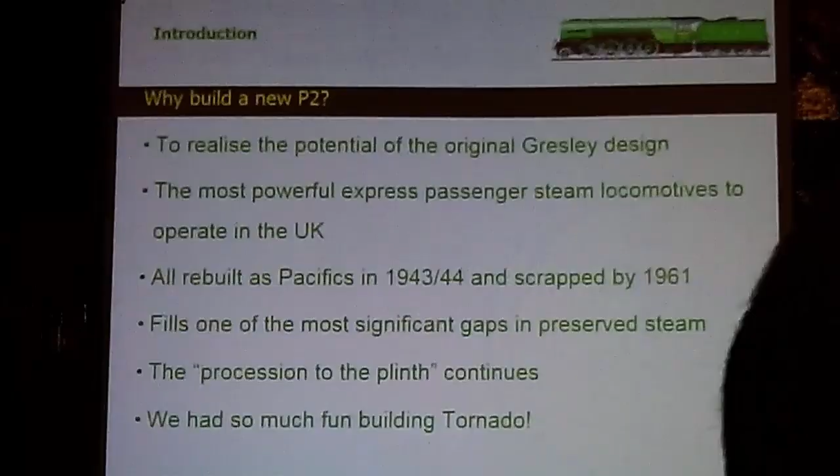Now, why build a new P2? Well, I suppose the thing that isn't really on this slide is that the chairman and myself always wanted to build a P2. In practice we built an A1 first, which was actually very much the sensible thing to do, because unlike the P2 class, the A1s work straight off the drawings and out of the box. And if you only look at their history, there was very little modification work between the birth of the A1s in 1948 and when they were withdrawn in the mid-60s.

On the other hand, the P2 has the odd problem or two, which I'll come on to. We were thought to be barmy building a new steam locomotive in 1990 as it was. I think if we'd chosen a P2, we'd have just never been given any credence at all. But we went on and built the A1, proved that it works and works very well, so P2 came along as the next choice. It was the most powerful express passenger locomotive in the country at the time.

Certain fraternity from the LMS will point out that the Duchess, in terms of horsepower, produced more on test than P2 did. I'm going to do something about that. We're planning to live up to our claim here. However, all 6 of them, there were only 6 built, were rebuilt as Pacifics in 1943 and 44 after Gresley had died, and his successor, Edward Thompson, basically had an almost pathological dislike of much of what Gresley did and was determined to make his mark. Unfortunately, his rebuilt engines were really no better than the worst performances of the P2, and had the fundamental drawback that they couldn't haul such big trains because they only had 6 driving wheels instead of 8.

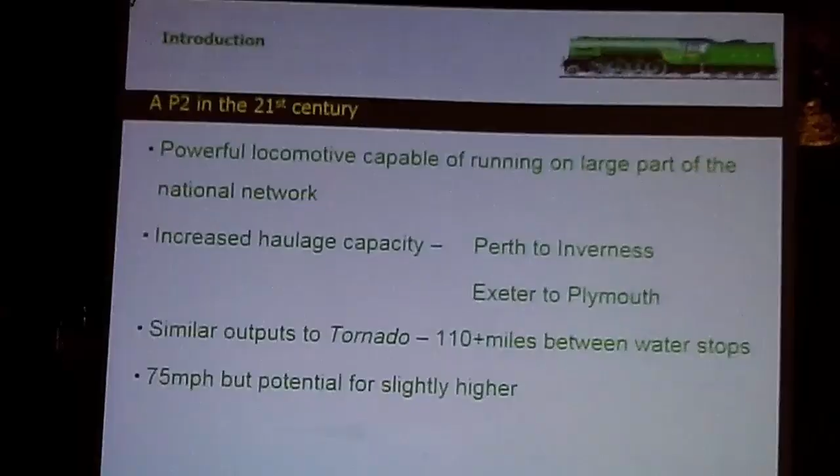So, P2 in the 21st century. Tornado will take 13 coaches almost anywhere, but won't take 13 coaches to Inverness or over the South Devon banks from Exeter to Plymouth because of the severity of the gradient. She'll do it all right, providing we don't have to stop, but it's very questionable as to whether she'd be able to restart 13 coaches on the 1 in 40 curvature of the South Devon banks if it's raining. So we are limited to 10 down there, and limited to 12, or technically 11, though we have taken 12 to Inverness, where the ruling gradient is about 1 in 60. The P2, with its extra pair of driving wheels, won't have such a limitation, so we can effectively take 13 or even 14 coaches anywhere we choose.

We say similar outputs to Tornado. We redesigned Tornado's tender to take extra water at the expense of some coal, so that she now takes 6,250 gallons of water in the tender instead of 5,000. And that gives us 110 miles minimum between water stops. That is actually quite important when we're on the East Coast Main Line. We are the only engine on the network that can do King's Cross to York with only one water stop.

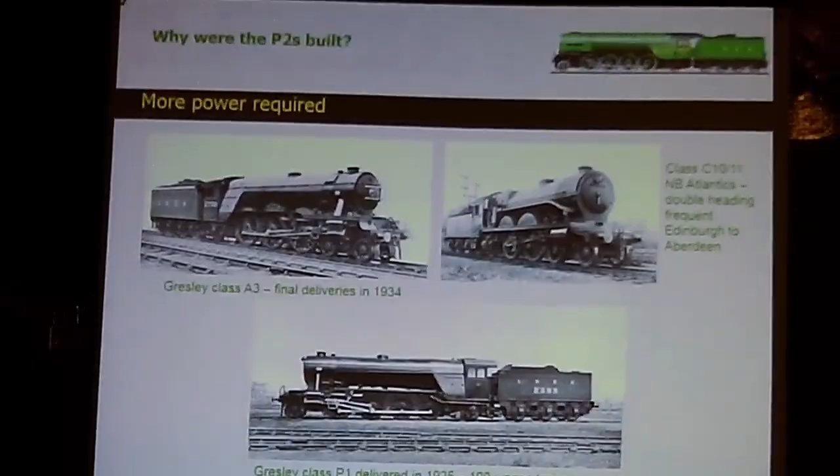So, why were the P2s built? Well, it all really happened back in 1930 when the LNER introduced third-class sleeping cars. And suddenly there were 2 sleeping car trains a night going to Aberdeen, which were loading consistently to 15 coaches and even more. And the maximum that the top-line engines, the Gresley A3 Pacifics - think Flying Scotsman - were allowed to take to Aberdeen unassisted was 11 coaches, because there are some fierce gradients on the railway there. And in practice, the civil engineer wouldn't allow you to hang another engine on the front of an A3 because the consist was too heavy.

So they were using pairs of the North British Atlantics, which is the engine you see on the right. Now, they were known as the miners' friend, as their coal consumption could be astronomical in practice. For an engine whose horsepower is about 2/3 of that of the later Pacifics, it burnt the same or slightly more coal. So you can imagine 2 of them were not an economic proposition.

So Gresley was invited to look at the idea of designing an engine which would haul these trains from Aberdeen, from Edinburgh to Aberdeen unassisted. Now, he had a bit of a go at the Mikado, or 2-8-2 wheel arrangement, back in 1925, when he built 2 freight engines based on the Flying Scotsman design, but smaller, with more driving wheels, specifically aimed at being able to increase the load of coal wagons hauled from New England at Peterborough down to King's Cross from 80 wagons to 100 wagons.

And these engines had no problem hauling 100 coal wagons. The big problem was, though, the railway couldn't actually cope with 100 coal wagons in the loops, and the train had to be split to get it into the sidings at Hornsey. So, the LNER, always tight for money, decided it couldn't really afford to make all the civil engineering alterations, so those 2 remained on their own, although they were highly successful.

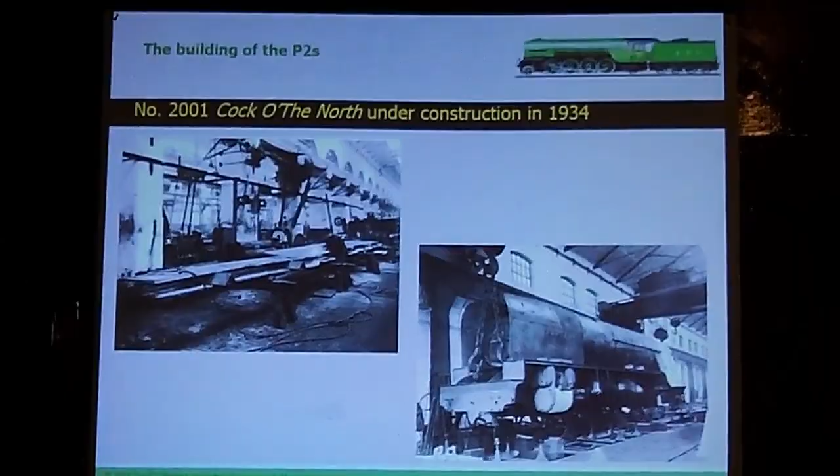1933, the LNER board gave Gresley instructions to work on the new P2 class, and you can see a couple of photos here. The frames are being cut out by a man with a gas axe, having hand marked it all out, which was the way you would start with on a prototype. On the right you see a photo of the engine nearing completion, and it looks like they are about to lift it to put the wheels underneath.

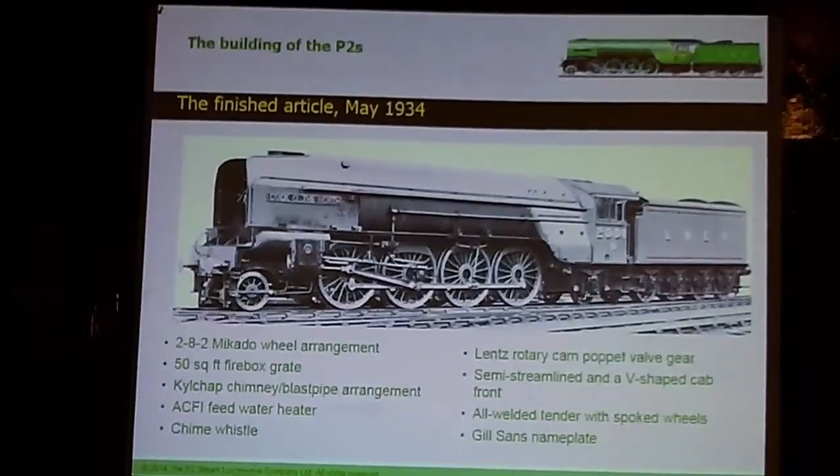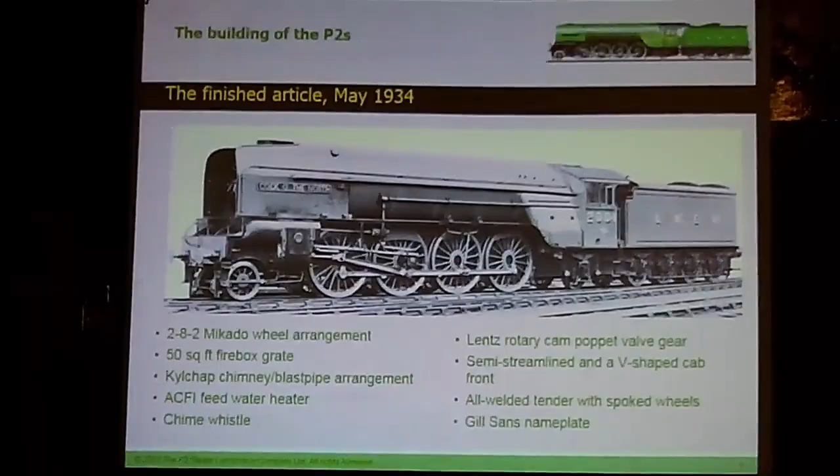It was the first time anybody had used a 2-8-2 wheel arrangement for an express passenger loco, and the first time an engine had appeared with 50 square feet of firebox, compared to the earlier Flying Scotsman type with 41 or 41 and a half square feet. It was also the first time he used the Kylchap double chimney arrangement, which subsequently went on to four of the A4s, including Mallard, and is generally held to be the reason Mallard was able to take the speed record.

They tried an ACFI feed water heater, a French device which used a pump to inject water into the boiler, preheating it through a heat exchanger in the smoke box. It was tried a few times in this country. The general consensus was that it improved efficiency because you recovered heat that otherwise went up the chimney, but it was so mechanically complicated that it offset the efficiency gains with the amount of maintenance required, so it wasn't perpetuated.

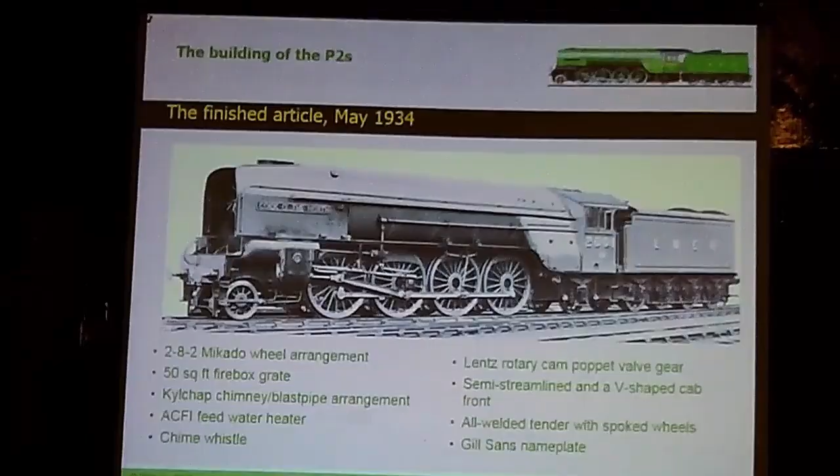It was the first time that the beautiful sonorous three-note chime whistle, which you heard on Tornado, was applied to an LNER Pacific loco. It also had this Lentz rotary cam poppet valve gear, which I will go on about quite a bit later.

Poppet valves are essentially like car valves. Normal steam locomotives, to admit steam to the cylinders and let the exhaust out, use pistons sliding up and down in a steam chest past ports. This uses the cam principle, where you've basically got a cam driving a poppet valve up and down to open it. The immediate beauty of this is you can have a separate cam driving the exhaust compared with the inlet valves, whereas on a conventional loco, the valve piston is both the exhaust and inlet valve, so you can't have the two timings altered relative to one another.

All welded tender - again, as an experiment, Gresley commissioned the Metropolitan Carriage and Wagon Company in Birmingham to build a tender entirely by welding. It's the first time it was done. And on a lesser note, it was the first application of Eric Gill's font for a locomotive nameplate, which the LNER subsequently adopted for all its advertising, correspondence, station names and the rest. Indeed, Network Rail still uses Gill Sans today.

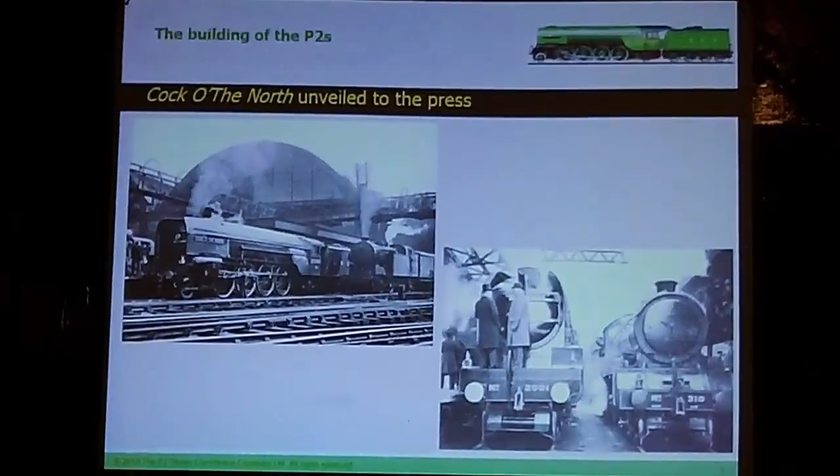Shortly after it was completed, it was unveiled to the press at King's Cross, and you'll see on the right Nigel Gresley himself with the bowler on, talking to the Lord Provost of Aberdeen on the front of the engine on its first visit to Aberdeen.

Meanwhile, and I'll come back to this in due course, another four locos were produced. The first thing that happened was a conventional version of this engine was produced for comparison, with piston valves, Walschaerts valve gear, and less of the experimental stuff. Then another four engines were built.

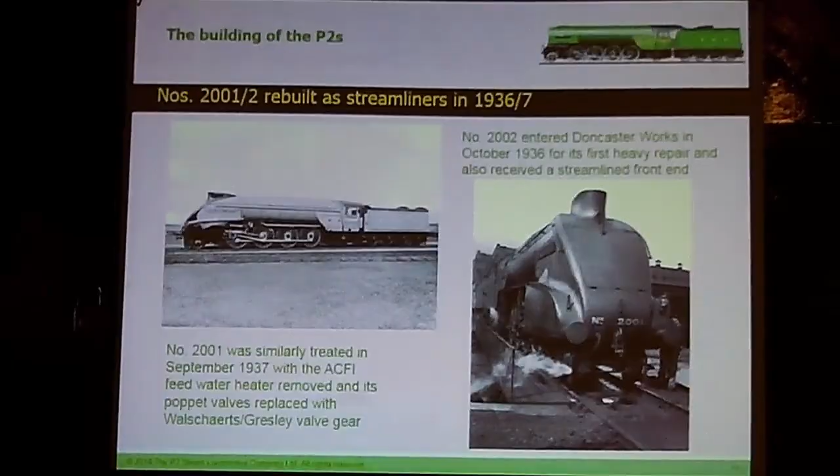This time, though, they appeared with the streamlined front end, similar to the A4 Pacifics like Mallard. They never quite worked - there was some question about whether the original design of front end would lift the smoke effectively, particularly with this double blast pipe, which produced very soft exhaust. Whereas it had been demonstrated that this arrangement on the A4s was the best smoke lifting arrangement ever fitted to a steam loco, apart from the publicity value it afforded them.

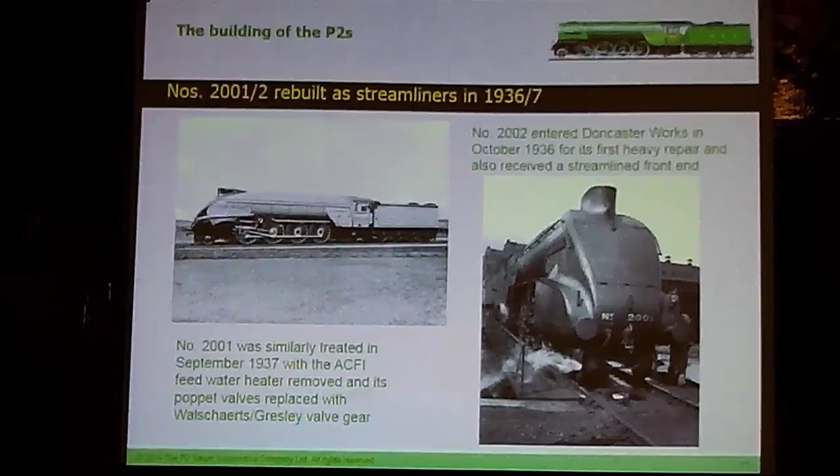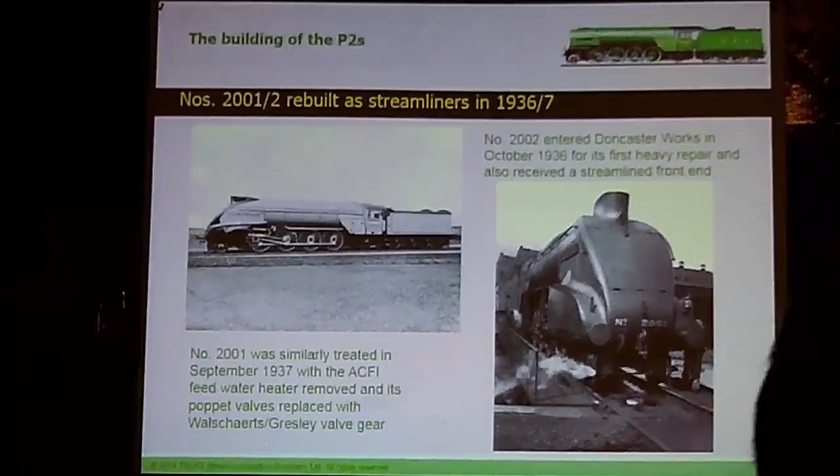Now, the engineering, he says, that's what we ought to be building. But there's a problem: we rely very heavily on interested people from the general public to fund this locomotive, and whilst serious railway enthusiasts will recognise that's a P2, a large number of the sort of passing interested railway type people will confuse that with an A4 Pacific and just say it's a badly built one. We have enough trouble with Tornado being confused with Flying Scotsman.

And therefore, we need to have this differentiation. The front end of the P2, as we are building it and as was originally built, was and is unique. There were only two of them ever built like that, and they didn't actually last long in that shape.

We are talking with aerodynamicists at the moment to ensure we don't have a smoke lifting problem, making use of the intermediate 70 years of aerodynamic development, so I'm reasonably confident.

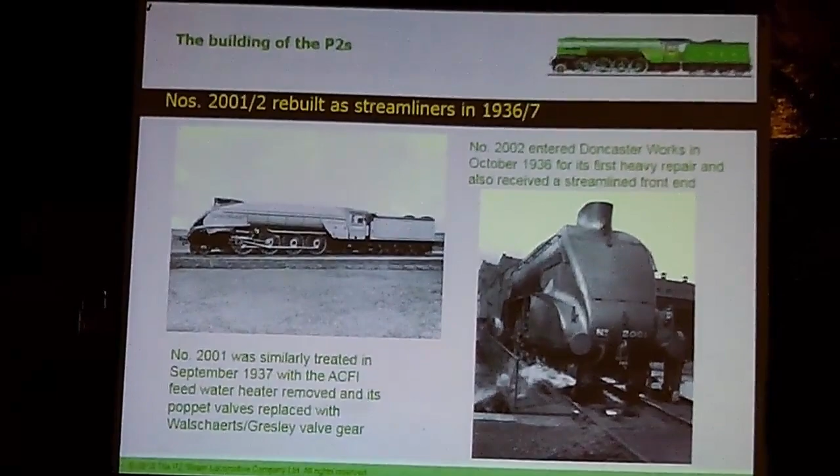However, the first two engines were rebuilt as streamliners in '36 and '37 to match the rest of the class. Now then, in order to make this happen, one of the key things is, are there any drawings in existence? And luckily, the National Railway Museum has got at least 300 drawings associated with P2.

Not quite such a full set as we had with the A1, where I reckon we had 95% of all the drawings that were ever needed for it. We've probably got about 70% or thereabouts, but bearing in mind we're having to do a major re-engineering exercise.

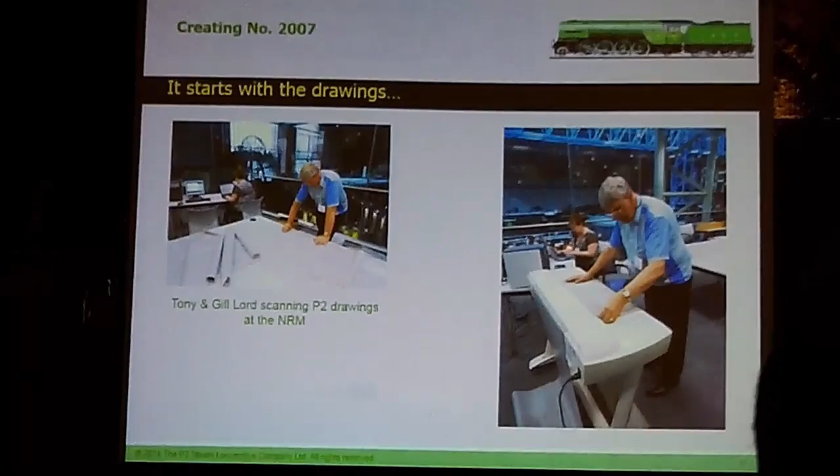Here you see my colleagues operating the scanner at York while we were scanning the original drawings electronically, so that we can do things with them.

So, one decision that was considerably different from Tornado was the decision to draw the entire loco in 3D CAD.

Initially, I wanted to do this because when we built Tornado, it all went pretty well, except for one area, and that was plumbing and electrical conduit work. There's an awful lot more pipework on Tornado than there ever was on the originals, because we have air brakes in addition to vacuum, and we've got a comprehensive electrical system on, whereas previously the A1s had a very primitive electrical system, and P2 hadn't got one at all.

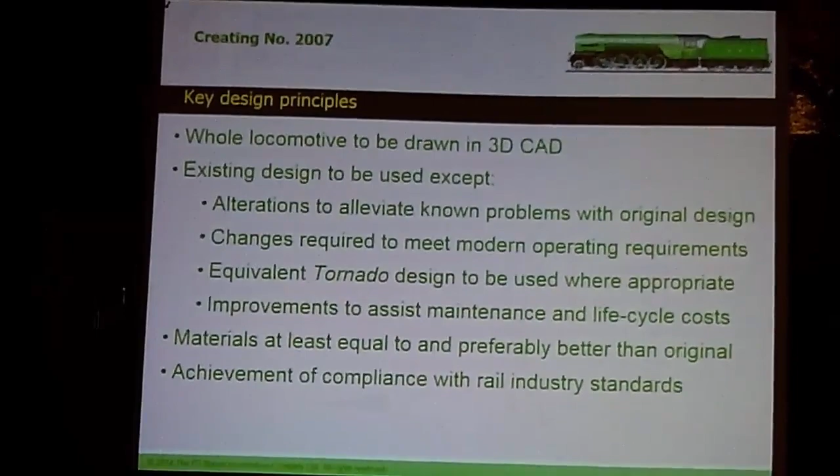So we designed all this and then installed it all off schematic diagrams with me pointing at the engine as to where things had to go. And if I was going to be away, I'd chalk on the side of the frames 'box goes here' with some dimensions, and I'd come back the following day and sure enough the electrician put a conduit straight through the space. This went on, and in some cases it took 3 attempts before we got the pipework right.

And some of it is not right. The electricians in particular have made getting this live steam injector off a job for a tame ferret with a big spanner. It really is a dog's breakfast, and we're not doing that again.

So this time I decided we were going to design all the pipework in 3D, and they would get detailed drawings as to where it went, and unless there was an exceptionally good reason, I wouldn't accept it anywhere else.

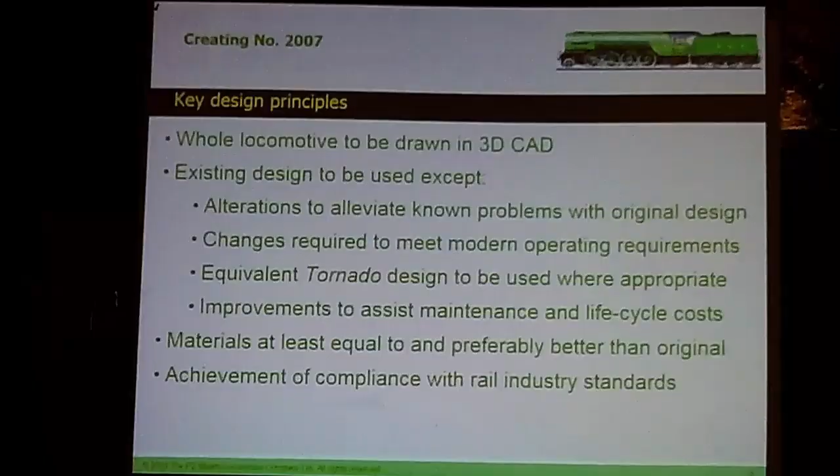That was it. However, since then, the chairman in particular, who also looks after our marketing, realised what lovely pictures this 3D CAD produces, and you'll see it all over our publicity. And it is very useful in other areas as well.

Now, we're going to stick to the original design as far as is practical. As I mentioned, there are some problems with this engine, which I'll come on to. We've also have to change it, make it work on the modern railway.

We've got to fit air brakes. We need electrical system. We need all the modern safety equipment, train protection and warning system, the on-train monitoring and recording, the black box, which of course is orange, this sort of thing.

And we also have certain other areas where we're just going to improve it anyway. In particular, we're going to use equivalent Tornado design where we can, and the LNER, in spite of being reputed for not going in for standardisation, they didn't at locomotive level, but they did at component level. And consequently, up there are probably about 250,000 quid's worth of wooden patterns, and half of them we're using again for the new loco, which is handy and useful.

We also are doing some improvements to help us with day-to-day maintenance and life cycle costs, the most spectacular one being the use of Tornado's roller bearing design instead of plain bearings.

But we've also, for example, fitted it with a rocking grate and a hopper ash pan, which greatly facilitates end-of-day servicing. And at the front end, we're putting, as we've done with Tornado, a self-cleaning smoke box, which is a whole series of baffles and grills, which, thanks to some aerodynamics, keep all the char out of the smoke box. They break it into tiny pieces and stick it up the chimney.

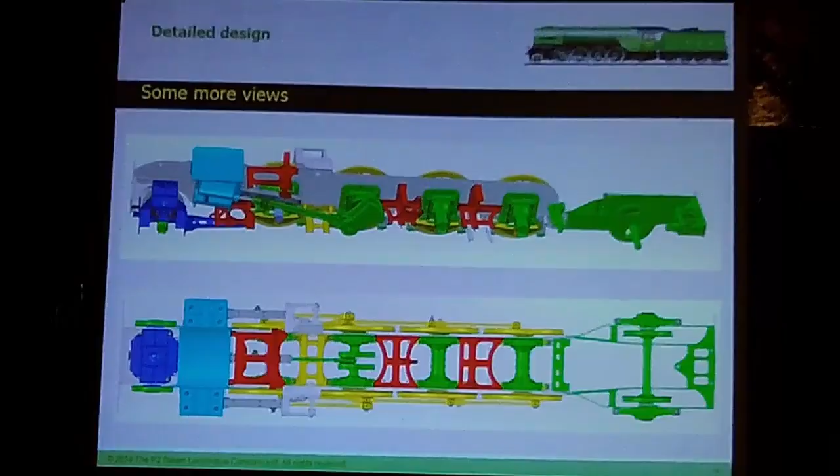We are also fitting roller bearings, and with them come things called cannon boxes. If you look here, the axles are actually encased in a steel casting from side to side. This economises on bearings. We use Timken roller bearings, and they are taper bearings, and they have to be used in pairs to give you end float control. By having an axle box effectively stretching from one side to the other, we only have to put 2 bearings in. In the case of the crank axle, we can't do that, so each of those axle boxes has 2 bearings in, so that's 4 bearings per axle. It was Timken's way of keeping under control the number of bearings that were in use.

Again, the green is stuff that's lifted off Tornado. The turquoise is the cylinder block, which I'll come on to a bit later, which we're completely redesigning. The red bits were steel castings, which we're modifying as fabrications.

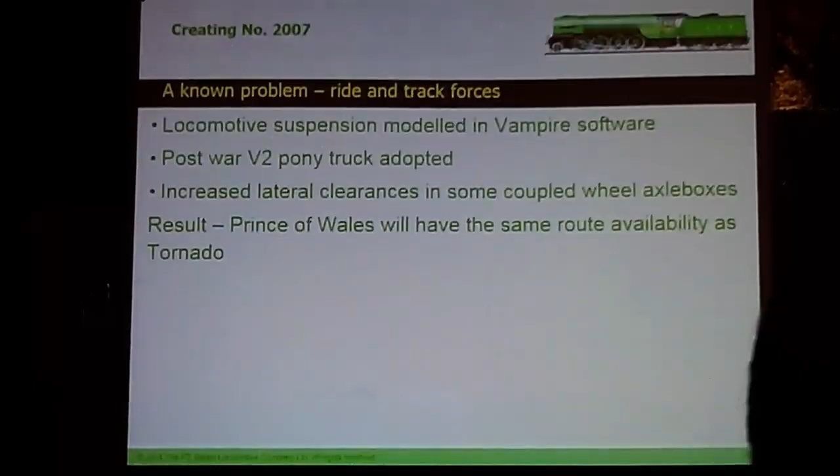We are casting wherever we can realistically do it, making a lot of use of polystyrene patterns, but the problem we've got with big one-off castings is that the pattern cost runs into tens of thousands of pounds, and we only need one at the end of the day. Polystyrene can be used, it's much cheaper to make, but if it's a big, thin pattern - this is using expanded polystyrene, where you make the pattern out of it and then bury it in the mould and leave it there. You pour the steel on top and it vaporises, because there's only about 1.5% actual solid matter, the rest is gas. But it's not strong enough, such that when you pack it up firmly in the mould, it will distort. And we've had this trouble when we were on Tornado trying to do bigger castings that way.

So we're going for fabrications. We can use better materials, we can weld to boiler standard with full penetration welding and full NDT, and be confident that it'll be a lot stronger than the original casting was. We also stress relieve before we machine, so we're back to almost the cast condition in terms of metallurgy.

That's one thing. Now, the other thing we've got to sort out: the engines certainly had a bit of a habit of falling off on tight bends in yards, which was put down to their excessively long rigid wheelbase, which isn't the case, as we've discovered. The pony truck at the front, the 2 small wheels, are suspended using Gresley's patented swing link suspension.

Basically, the locomotive sits on the pony truck through a series of links which are at a different angle, so that as the pony truck moves sideways when you go around a bend, it tries to lift the front of the engine up a bit, and the idea is the extra weight pulls the pony truck back to the middle. The only problem is when it goes right over to full travel, it's attempting to lift the front of the engine 1 7/8 inches, which it won't do because the springs will equalise the pressure.

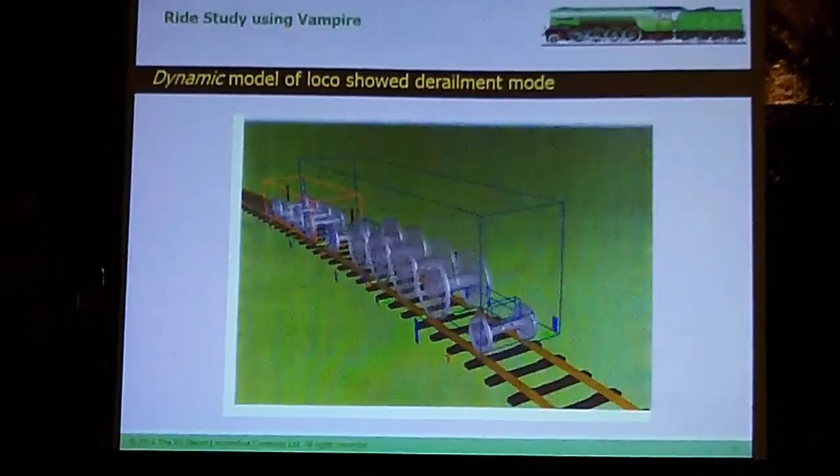In order to demonstrate all this, we commissioned a Vampire study - Vampire is the software that the railway industry uses to predict ride and track forces. This is an excerpt from it showing the engine just about to go around a curve which will derail it, and the reasons why it was doing it. The whole lot's modelled accurately on the computer.

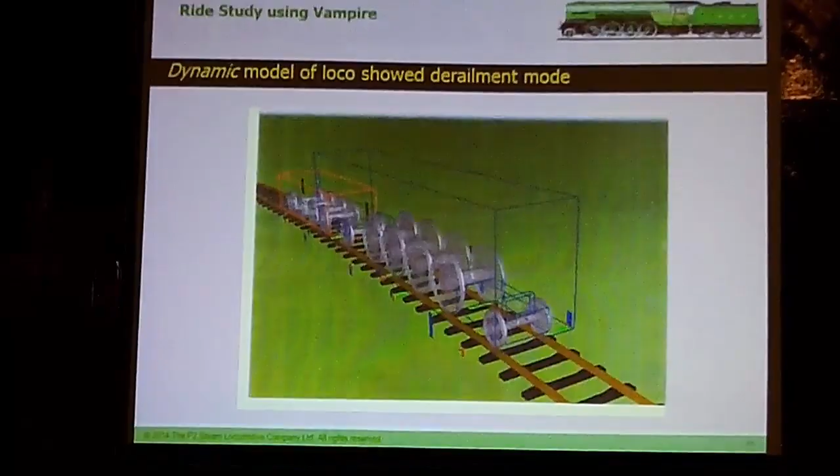We had a feeling we were going to need to do this a long, long time ago, because when we tested Tornado, we had to do some limited track force testing, only to demonstrate that it wasn't going to break the rails, and it wasn't any worse than the modern standards allow. But we took a very comprehensive set of track force data by instrumenting the engine on our final test run from Tyne Yard down to York.

Now, conveniently, the Network Rail yellow new measurement train had been through the week before, and therefore had accurately recorded the condition of the track from Tyne Yard to York. Delta Rail, who were doing the modelling for us, produced the model of Tornado in software, ran it over the recording of the actual track condition, and demonstrated that...

Tornado's model was not far off what actually happened, and by tweaking the model about, they actually got it very, very close to, in reality, what would be predicted from the model's ride output. So that means we've now demonstrated that Vampire can be used for a steam loco.

The next stage is to reconfigure the model so it's a 2-8-2 with the suspension arrangements that this has got. Have a look at it again. And the result was that it did show that this swing link suspension was causing some strange effects from time to time, but with these side control springs, it was fine. In fact, with that and the other minor tweaks we've done, it now actually rides better than Tornado at speed, which you'd expect with a long rigid wheelbase on an ordinary track, and it doesn't produce excessive track forces when it's going around bends. So that fixed that one.

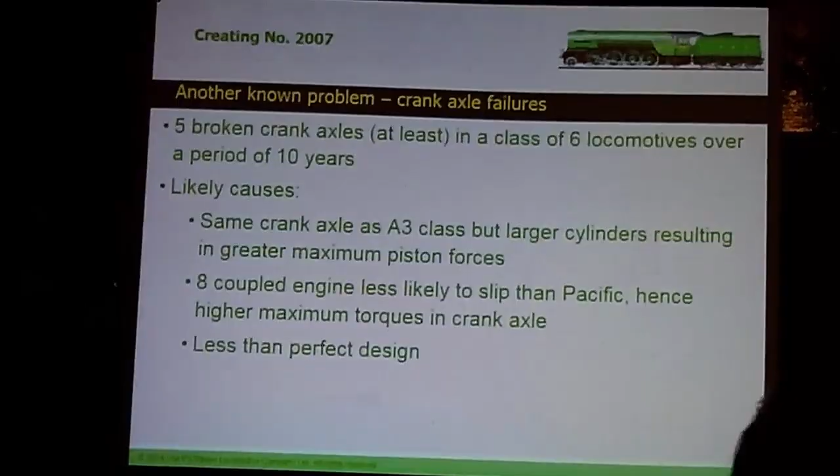The next problem we had - the wheels fell off from time to time. The P2 class, in a 10-year period of operations with 6 locos, had 5 broken crank axles, and they always broke just behind the wheel. Now, the likely cause is the same crank axle that the A3 class has in Flying Scotsman's got, but with larger cylinders. Also, 8-coupled engine instead of 6, they don't slip very often, so the peak torques will be much higher. And also there's some design issues as well.

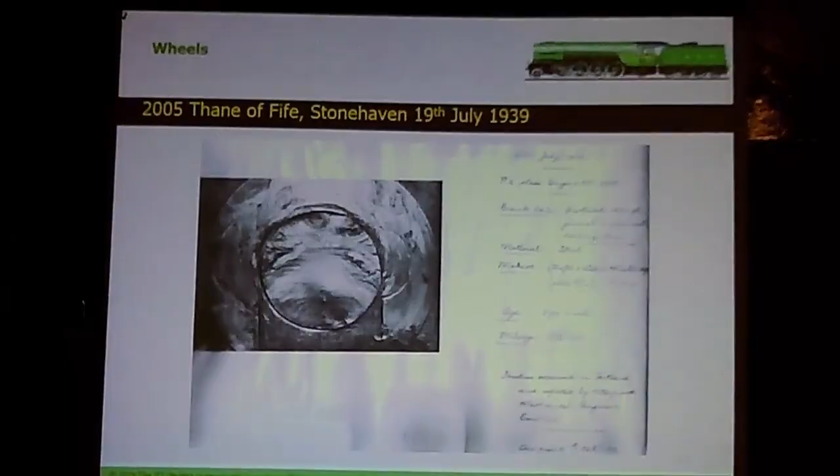Another bit of pure good luck. We're having Tornado's axles tested, which we have to do with ultrasonics every 3 years. The guy doing it, not far off retired, was trained at Doncaster. When Doncaster was chucking out documentation, he fished out an album of the rogues gallery of broken tyres, broken crank pins and broken axles. He showed it to me, and I'm thumbing through it, historically interesting.

There we have 2005 having broken its crank axle at Stonehaven after 133,000 miles, and we've since learned that the youngest one did it at 93,000 miles. Pretty obviously a problem there.

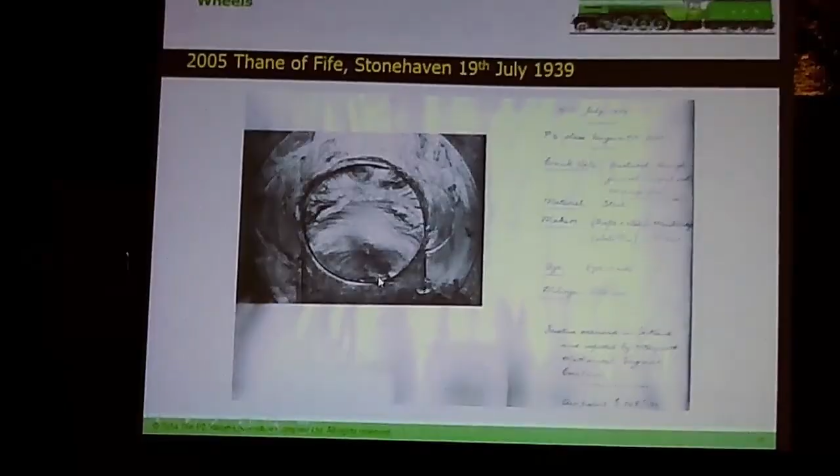It actually quite clearly demonstrates, we're now looking at the broken axle end, the wheel should be there. You will see here, there is the end of a keyway. That is the end of a keyway with a fairly sharp corner in it. Crack started there, radiated through about two-thirds of the way through, at which point the loud bang has occurred and the axle's fractured. Fortunately, because it was happening under high torque conditions, it always happened at low speed. You don't get high torques at high speed.

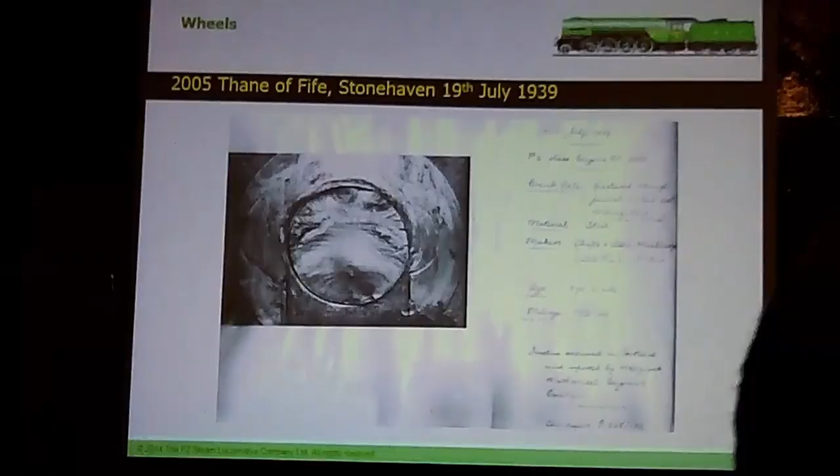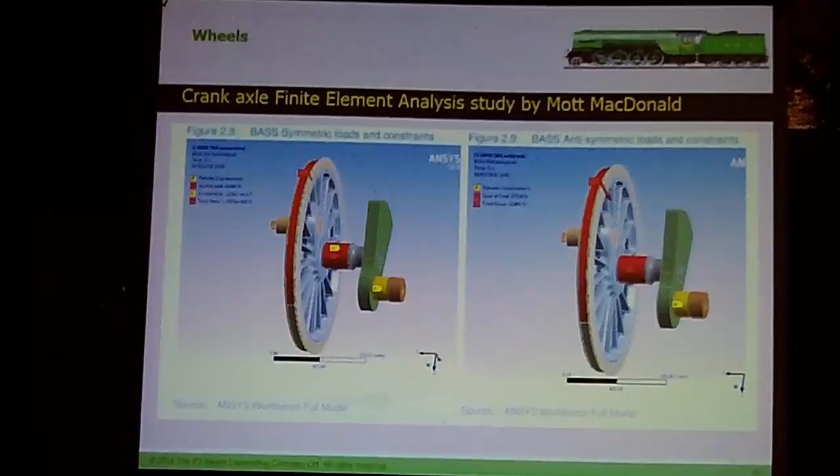Anyway, we obviously can't build a loco that's going to do this. So the next phase is that we commission another study from one of the railway specialists, in this case Mott MacDonald's at Derby, who have the bloke who's rated as the wheel set expert in the country. Finite element analysis to first of all look at the original design. Then we immediately proposed the Timken design, which is on Tornado, which came with the roller bearings, and had such things as stress relief grooves and a sensible modification to the keyway to reduce the stresses. That served as far as we got, but it was still not quite giving us what we needed.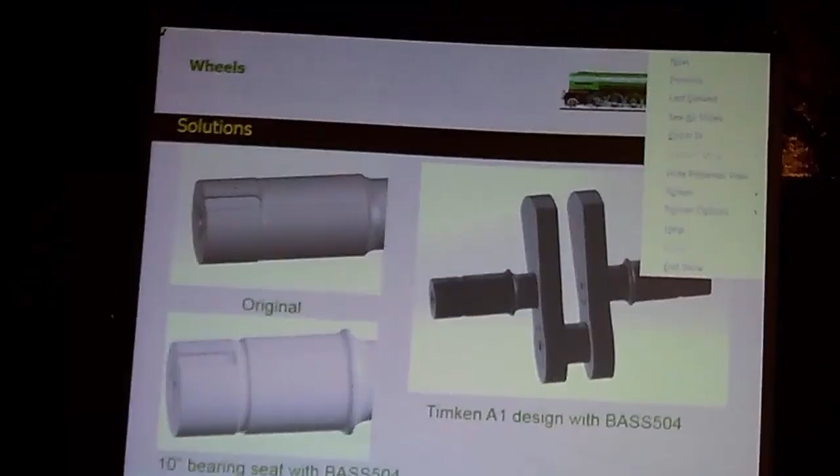However, they ran it again, and although it dramatically improved the fatigue life, just to put it into context, the original axle was showing that at the worst case condition of 75% cut-off and full regulator at 10 miles an hour, the life was 900 miles. Of course, we only run for very short periods in that condition, once you're up, and the target's 250,000 miles for this.

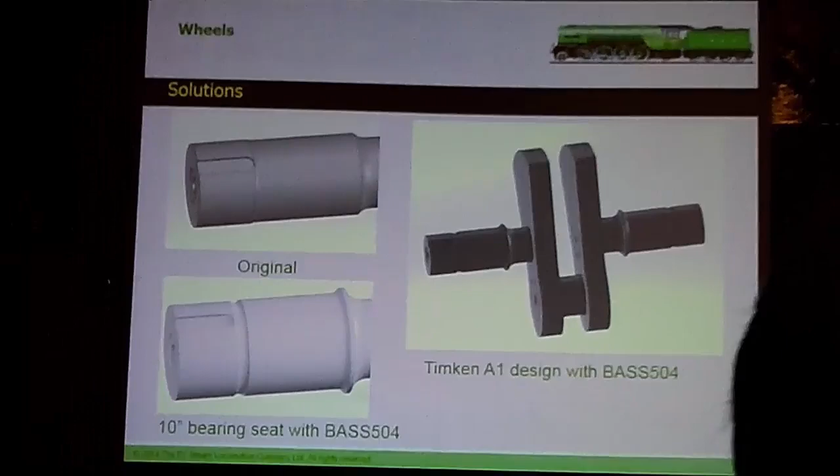So at the second iteration, we went back to the usual railway method, made it a bit bigger, and we increased the axle diameter where it goes through the bearing from 9 3/4 inches up to 10 inches. That suddenly more than doubled the fatigue life again, and has taken us to a point where we're reasonably confident we'd get to 500,000 miles, but we will still adopt the LNER practice of changing crank axles at 250,000 miles. So, problem solved.

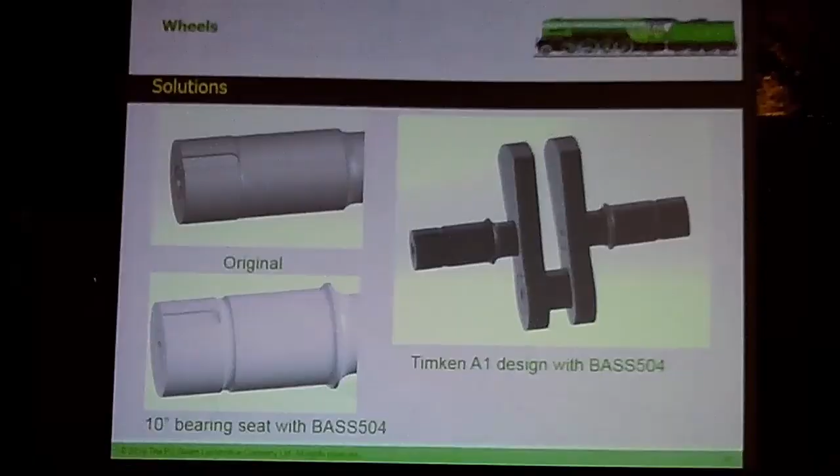We've also used the best possible steel axle material, which is stronger than the standard stuff, which helps a bit. At the same time, the crank sweeps, which are the same design as every other LNER Pacific, we've now got EN19 as the material there, so it's significantly stronger than the EN8 that the originals were made from, but still retains good fatigue resistance and is ductile. Of course, the railway industry as a whole hates hard, brittle materials. The idea being, if it goes wrong, you want whatever it is to bend and not to fracture, because rods flying around at high speed which are broken are extremely dangerous. So we have to keep a very close eye on ductility of materials.

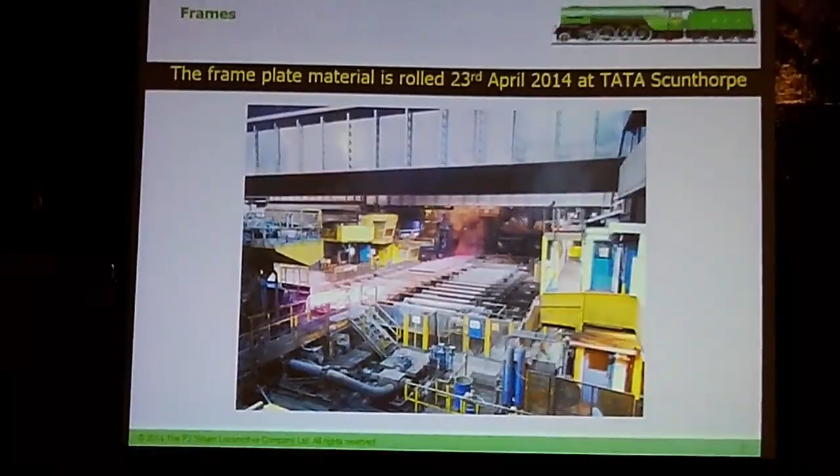Moving on. We're now in manufacturing phase. Frame plates were ordered from Tata back in the beginning of 2014, and we went for a day to watch our frame plates being rolled. We didn't get a lot of joy trying to get Tata interested in this.

However, you will notice that we'll call him the new engine Prince of Wales. There's good reason for that. He's very interested in steam and very interested in what we are doing. After a few weeks of not getting much interest from Tata, our chairman rang the Prince's personal private secretary, who we happen to know, and said, 'We've got a problem here.' Within 24 hours, we had a very senior person at Tata contact us about what we wanted to do. So that's had its uses.

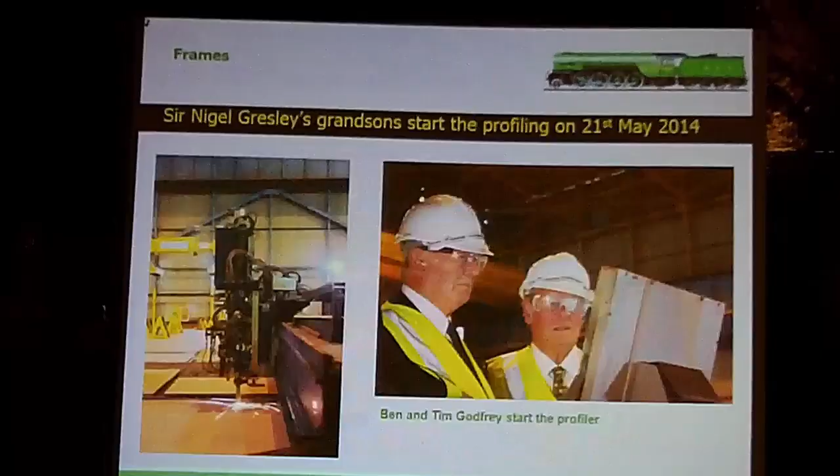A few weeks later, the plates have now been grit blasted and primed and are being profiled using their CNC profiling machine. The process was started by the two gentlemen on the right, who are the grandsons of Sir Nigel Gresley himself, still very much in existence. So there's a nice bit of continuity there.

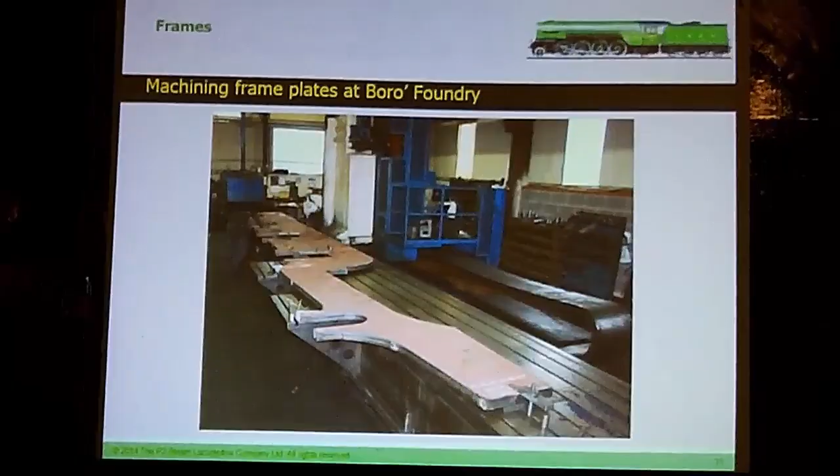After that, the frames went to the Boro' Foundry in the West Midlands, who have a 42-foot-long Elgar mill, which we could put them on to do all the crucial machining in one go. Another change from Tornado and standard practice: we have machined these frames all round. Generally, you only machine where you've got something touching.

We found this was very difficult when, for example, setting the foot plating up, because on Tornado, the top edge of the frame is a bit wavy. Not that much, it's been dressed up from flame cutting, but it's not brilliant. We were trying to set the frames to align in space, and that is always very difficult. This time, we've machined the top of the frame, so we know they're plus or minus 5 thou where they should be, and we simply set the running plate off the top of the frames. The other benefit is we've machined away any heat affected material where the flame cutting's taken place, which will reduce the tendency of the frames to crack in the future.

In due course, a flat pack arrives here in Darlington. Within a couple of days, we've set it up with temporary spacers, lots of bits of pipe, bits of threaded rod with nuts on. We were able to use Tornado's frame stands again, so it's nice that we didn't have to buy a new set of them.

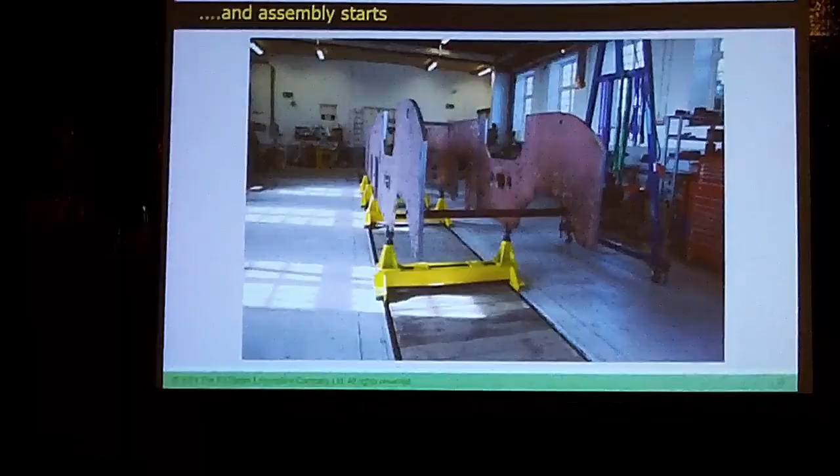Then we come to the interesting bit of putting the little bends in the back of the frame. They narrow down at the back so that the pony truck, which is the carrying truck at the back, can move side to side without wheels hitting the frames.

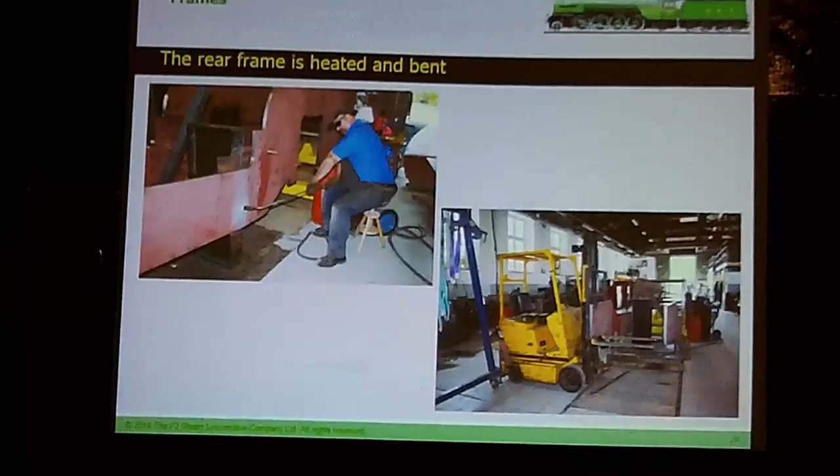Mick and myself warmed the plates up with two big warm beam torches until they were glowing red hot, then we simply nudged it with the forklift until we got it round to agree with the template we made. Having done that, we then went to the back of the engine and repeated the exercise, nudging the other way. So we put the dog leg in the frames.

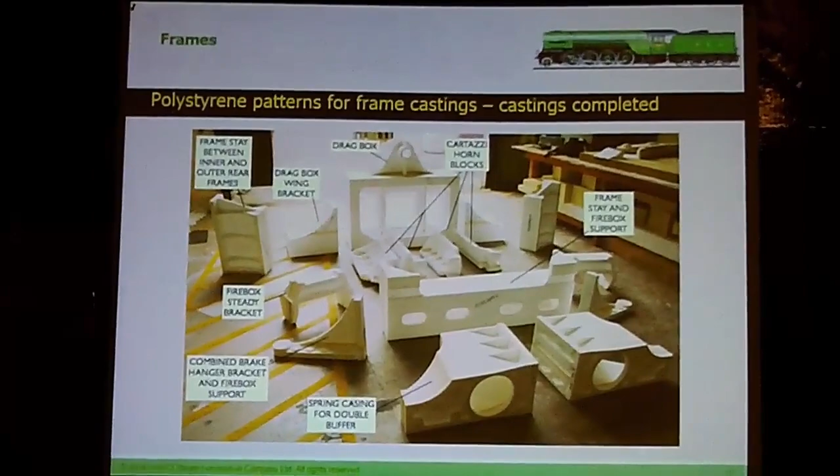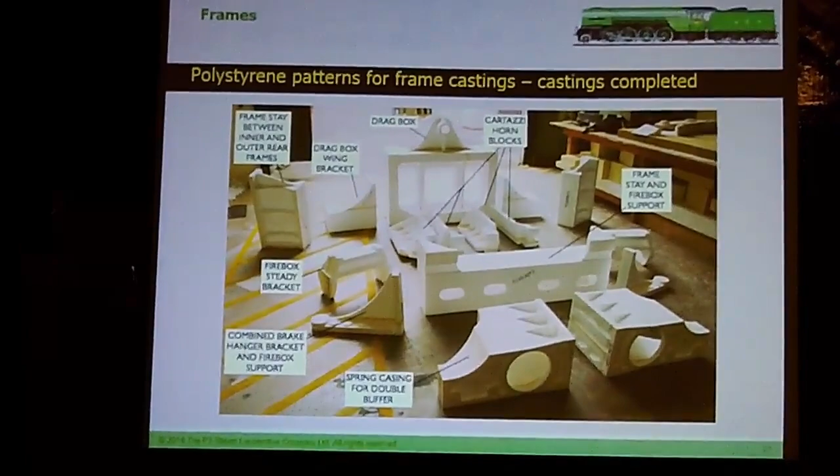I mentioned polystyrene patterns. Here's a significant number of bits which were made out of polystyrene. We've used poly in the past, but it's all been fabricated by hand. This time we took my CAD 3D models, emailed them across to Baker's Patterns in Telford, and they have a CNC milling machine which will take a 2 metre by 1 metre by 1 metre block of solid polystyrene and mill whatever you like out of it. So all this lot was simply CNC milled straight off the STEP files which I sent over from the 3D models.

They increased the size of it by 1%, so we got the 1 in 100 contraction allowance, because when the casting's cool, they tend to get smaller than the patterns.

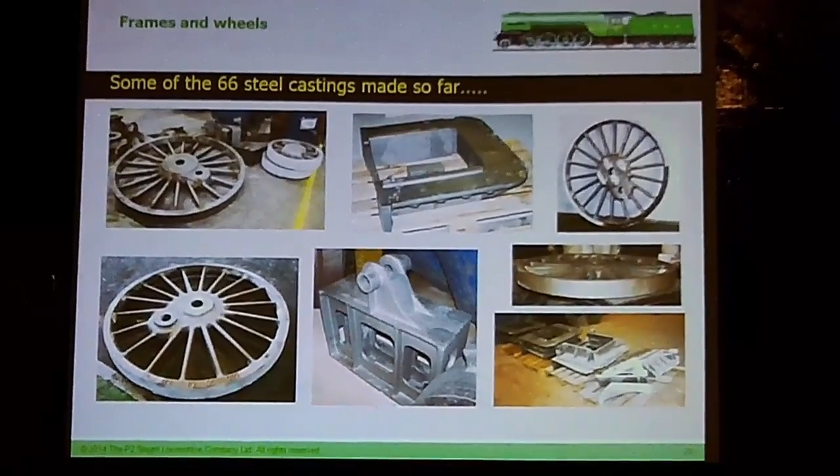However, on the steel castings, for several of them, we used wooden patterns. In the case of the wheels, there's 8, so there was justification for a new wooden pattern. You can see the drag box in the middle bottom there, which is in the engine now—that's a polystyrene one. The horn blocks above, there's 8 of them as well, so they justified wooden patterns. In fact, we used the Tornado ones again.

66 steel castings so far. I mentioned we needed to redesign the cylinder block. The P2s were unusual in that all 3 cylinders were cast in a single block, monoblock style, and as applied to the P2, there were a number of significant drawbacks.

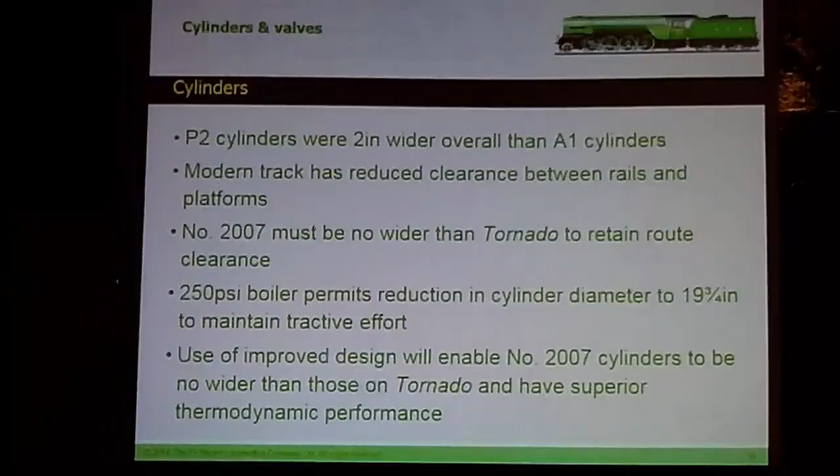Two things happened here. Firstly, there were several places where steam and exhaust passed through adjacent passages separated by a single diaphragm wall. That causes the incoming steam to superheat the outgoing exhaust and lose energy in the process.

There was another issue with the poppet valve here - the clearance volume at the end of the cylinder. Imagine your piston slides along the cylinder - there's obviously a little gap so it doesn't hit the back, and there's the volume of the ports up to the valves. You want to keep that to the minimum because any steam in there doesn't actually do anything for you. The target on a modern steam loco is 8-9%. The P2 had 14% at one end and 16% on the other end on the outside cylinders, which was obviously not good. So I've managed to get it down to about 10%.

And then, by duplicating the same valve arrangement as close as I possibly could on the middle cylinder, we've now achieved something like 10% across the engine.

Other things though, the other problem we have with cylinders is the width. P2 cylinders, because they were bigger, were wider than the A1 cylinders, and at the moment the A1 cylinders are at its tight point on loading gauge. This is due to the railway progressively moving the track closer to the platforms to stop passengers falling down the gap. So we have to watch this.

We can win this back by a mixture of using the higher pressure boiler that Tornado has, which means we can make cylinders smaller for a given power, and also by making them out of steel we can make them thinner, and that gets us the 2 inches off the width.

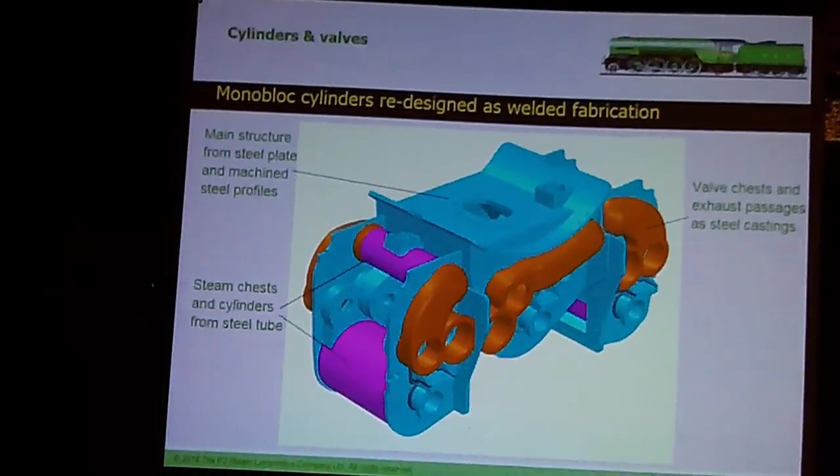Not a one-piece casting at the moment, it's a fabrication. The brown bits are cast sections because they're complicated in shape, but being steel we just weld them into the fabrication. The purple bits are lumps of tube. The rest of it's all cut out of flat, or in the case of the blocks, machined out of profiles, out of solid, CNC machined again.

I haven't done it on this scale, but I've produced a very nice set of 15-inch gauge A3 cylinders for an engine that went to Australia by this method. And it's not new - the Germans at Meiningen have been building fabricated cylinders since shortly after the war, and they've got the hang of it.

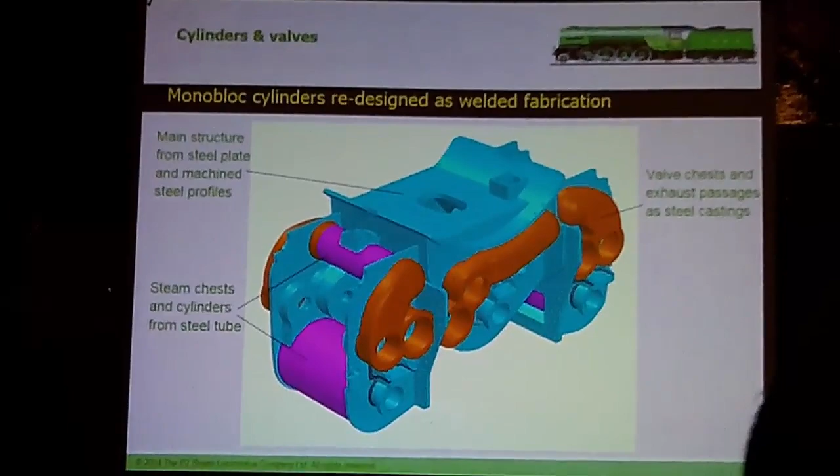The crucial thing you have to remember is to stress relieve it before you machine it. Otherwise, superheated steam will slowly stress relieve it, and the bores go oval and the pistons don't fit properly anymore.

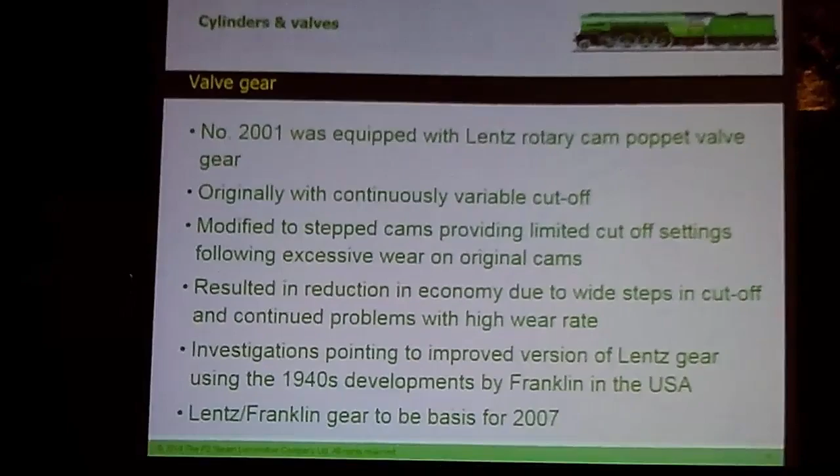So, I mentioned valve gear - this thing had this poppet valve gear on it. Now, York, disappointingly, have got virtually no drawings of this because the design was owned by the Associated Locomotive Equipment Company, who guarded the design very closely because they made their money by selling sets of valve gears to railways and then selling them spares forever. And if the railways had the detailed drawings, the ALE knew they'd just make their own spares. So consequently, you never got any more than the odd dimensional installation drawing.

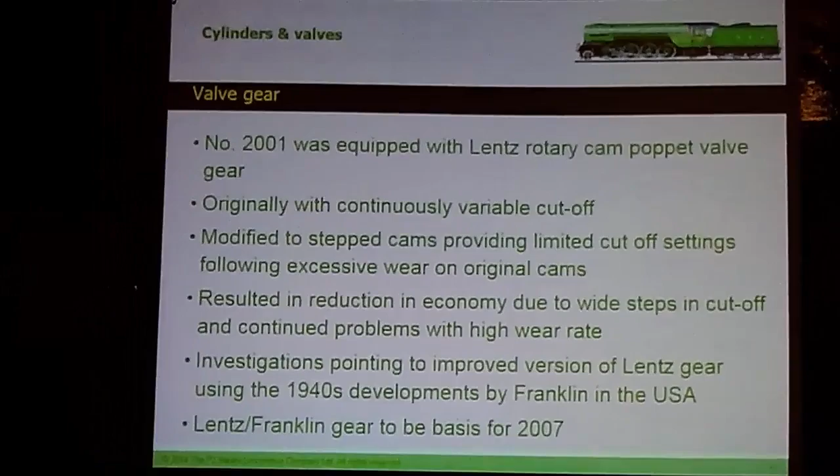However, fortunately, although we've been through the ALE archive, bits of which are around, there's not a lot of drawing stuff, certainly not applying this early on. Fortunately, about the same time as the P2s were built, they supplied 120 sets of this valve gear to South Africa, and we have managed to acquire copies of the crucial South African railway drawings, so that's given us the missing drawings. Size for size, things like the gearboxes and their design are the same, so we've got drawings for it after all.

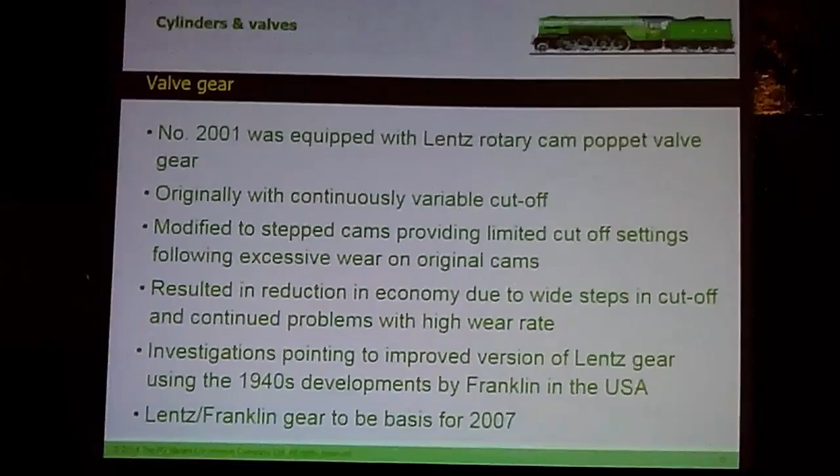We are also going back to the original idea of continuously variable cams so that we can alter this cut-off, which is the time you cut the steam off going into the cylinder.

Railway steam engines don't have gears, but instead we have variable cut-off. In other words, when the engine starts, we start with a maximum cut-off, steam being let into the cylinder for nearly the whole stroke. Once we get going, this is obviously very wasteful because you let steam up the chimney still at high pressure, so we reduce the percentage of the piston stroke we let steam in for. By the time we're cruising, we're only letting steam in for 15%, letting it expand and give up more of its energy.

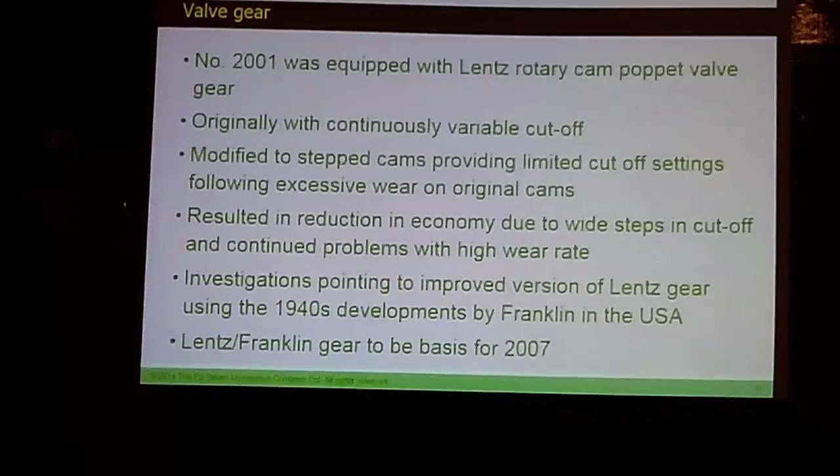It's the entropy of steam, isn't it? Absolutely, it's a lot of it. Oh, we've got a lot of that on this engine. Yes, we're trying.

The original P2 valve gear did just this, but thanks to the limitations of metallurgy at the time, the cams wore very rapidly on it, because at times the cam followers' corners were resting on the cams, not the flat surface.

In order to overcome this, Lentz went back to a set of stepped cams, which is the way they'd always done it before. But you only get a very limited number of cut-offs there. The typical thing is, on Tornado, when we're cruising along at 17% cut-off and we come to a bit of a gradient, the driver will make the smallest control, which is 1% cut-off increase, to compensate for the gradient.

Might go 3%. The P2 went straight from 17% to 25% in one step. So you got to a hill, increased the cut-off, which is equivalent to changing down the gearbox. The engine just romps away, and the only way you can control it is by partially closing the regulator.

That immediately spoils your economy because you're not using maximum steam pressure. However, we were fortunate in learning about Franklin, who had developed the Lentz gear in the States, and even more fortunate in being put in contact with the son of the man who did the development work, who had his father's archive.

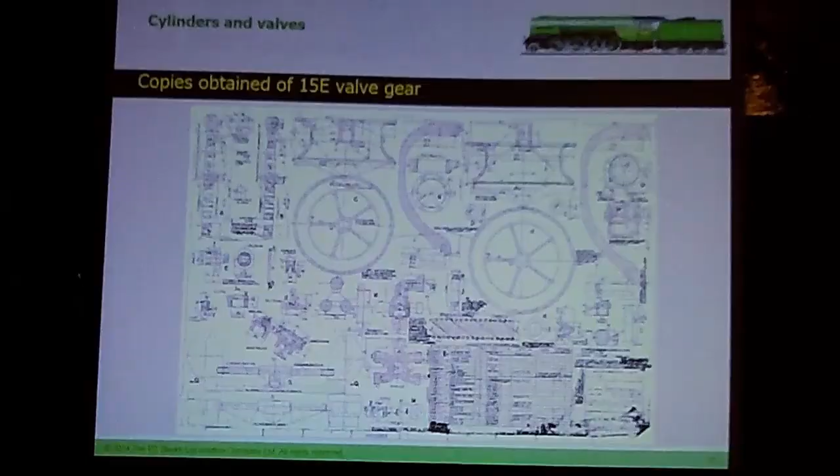There is a set of the Lentz gear on the South African loco, and here we have a typical drawing of the valve arrangements from South Africa. Now the chap in South Africa, in America, they'd actually fitted it to about a dozen locomotives over there, each a single member of a class as a demonstrator.

However, this was in the late 40s when the Americans were dieselising like crazy, so it never caught on. But all the applications they made over there worked very well, and this engine here ran right to the end of its days in 1959, having had the gear on for 11 years, and they never did anything to it. It just worked. So we know that the development worked there successfully.

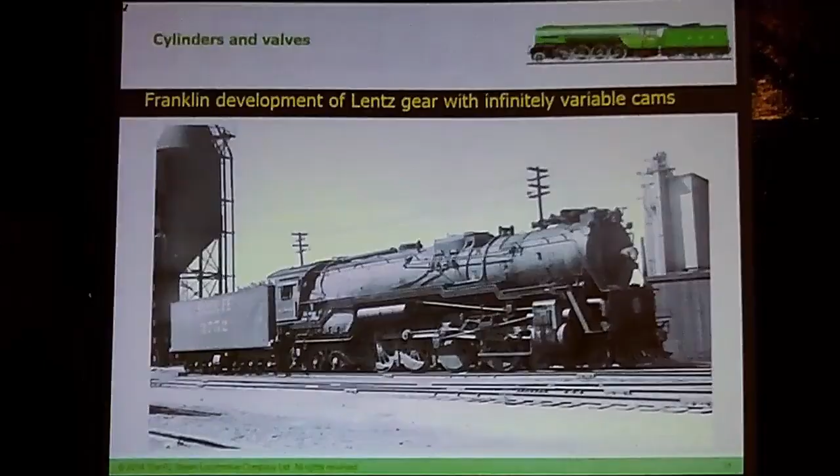Anyway, as I said, Charles Smith, the guy who had his father Vernon Smith's archive, duly sent me a load of drawings, because he'd had trouble scanning it, and I learnt why when he said 10 feet long. And this is hanging about another foot off the end of it. You put that into the average scanner and it goes for 8 feet and stops.

And we overcame the problem by the simple expedient of scanning one end of the drawing, turning it around, scanning the other, and then electronically joining the two bits back together again. So that got us onto that.

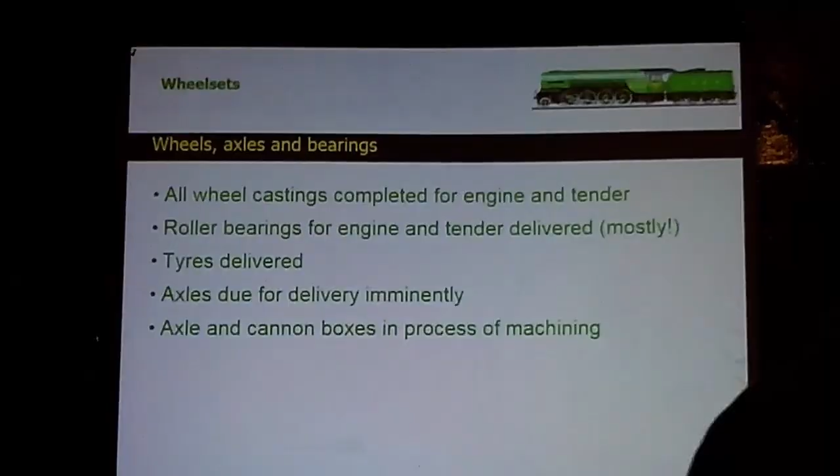Now, I've already mentioned that we're using Tornado's roller bearings. We've got all the wheels - in fact, you can see them dotted around here. 8 driving wheels here, and the heap behind has got the tender wheels and the pony and Cartazzi wheels. We have all the tyres in South Devon.

However, axles have been running rather late. In fact, the first two are just beside my packing case - the Cartazzi and pony truck axle are there. We've just opened it to make sure they're the right shape and check them over before they go off to the assemblers.

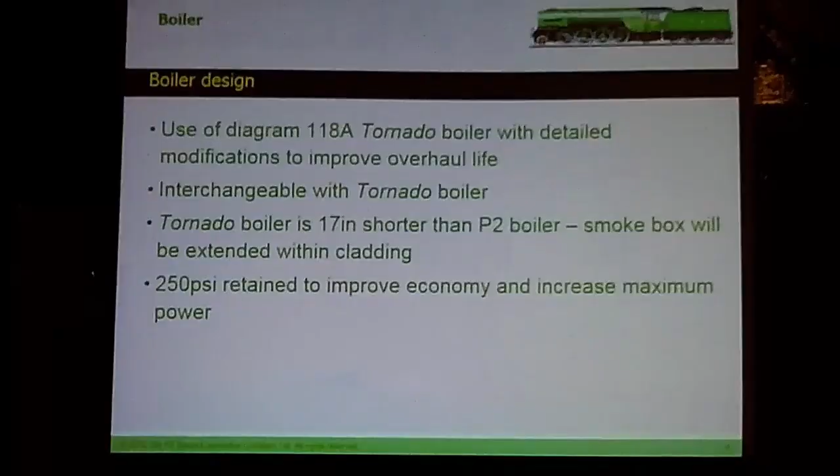I mentioned that we were going to use Tornado's boiler, which we've already done some development work on to improve its life. In particular, the foundation ring corners, which is where the inside and the outside of the firebox join at the corner, have a habit of fracturing on the Tornadoes.

They were originally made by machining out of a solid piece of plate. The problem is you've got grain flow in the plate, and the point where we have the maximum stress is in the corner there, whereas the inner firebox expands and contracts. It's flexing that corner all the time, with the grain flow unfortunately running in the position of the highest stress levels.

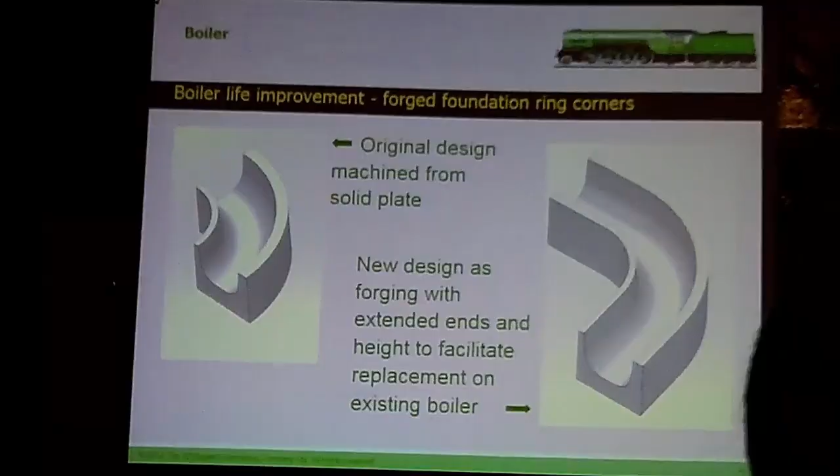So we've since had forged corners made, with the grain flow running round the root of the groove rather than running longitudinally round the corner. And we've put them on Tornado for the first time with the overhaul last year. I'm keeping my fingers crossed, but there's no sign of any new cracking starting, so we're hoping we're going to get the full 6-year boiler overhaul life without any changing in between.

Next thing, the smokebox was sponsored to the tune of 50,000 by the Gresley Society, who had a bequest, part of which was to build a famous statue, which you may have heard of, involving the non-duck at King's Cross, of Gresley himself.

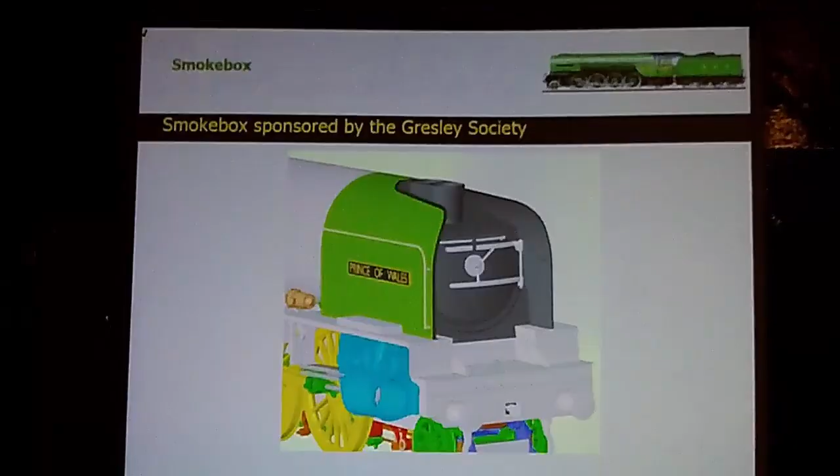The other aim was to help any organisation building a replica of a Gresley engine. Of course, we happen to be the ones doing that at the moment, so it's very useful. You'll see much of the smoke box is already here. The lifting plates have been made, that's the green bits, and we're expecting more back from grit blasting any day now. It's a right pig to make - it's egg-shaped, with a sloping front and sloping smoke chimney shape. Nothing really fits and works on it easily.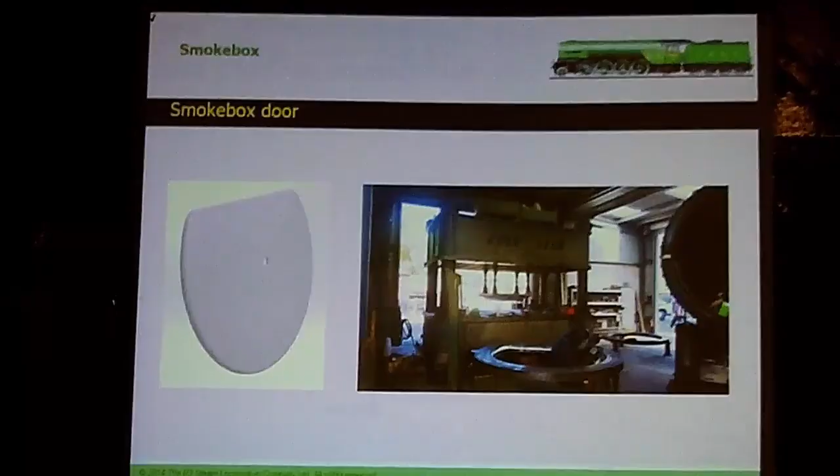The next thing we come to is making the door. Normally you make a door for a steam loco by spinning a tank end and then locally working over the edges to the sharper radius found on the smoke box door. Can't do that easily with this because it's got a flat top. Although we could have done it from a round one and then done a lot of cutting and shutting, I wasn't confident we could get the shape right, and this is the face of the engine - the thing most people will see first.

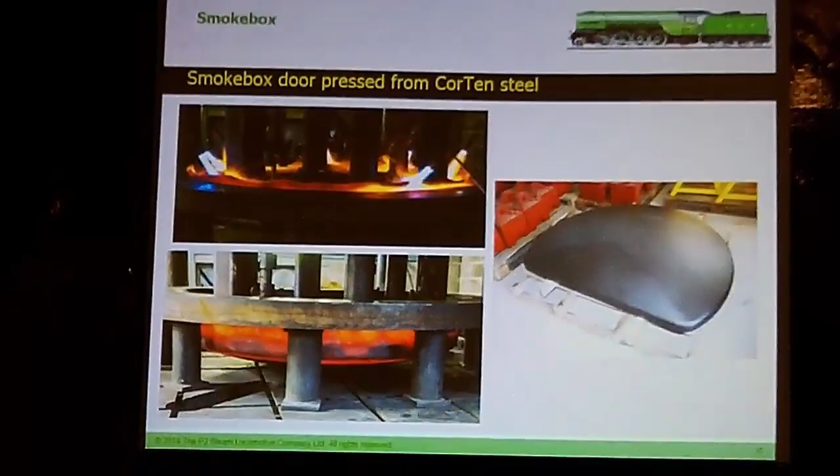So we decided, after looking at other alternatives including CNC machining it out of a piece of 8-inch thick plate, to go down the traditional process of having press tools made. The South Devon Railway, which now has the old Brigham boiler works there and a 600-ton press, duly made male and female presses, which you'll see on the right, and pressed the thing out of a sheet of Cor-Ten steel - the stuff the Angel of the North is made of - for the whole smoke box in order to try and cut down corrosion. Tornado's already lost 4 millimetres out of its 10 millimetres in some places, and that's only 8 years old. Anyway, the result, which unfortunately is upside down at the moment, you'll see in a few minutes, is spectacular.

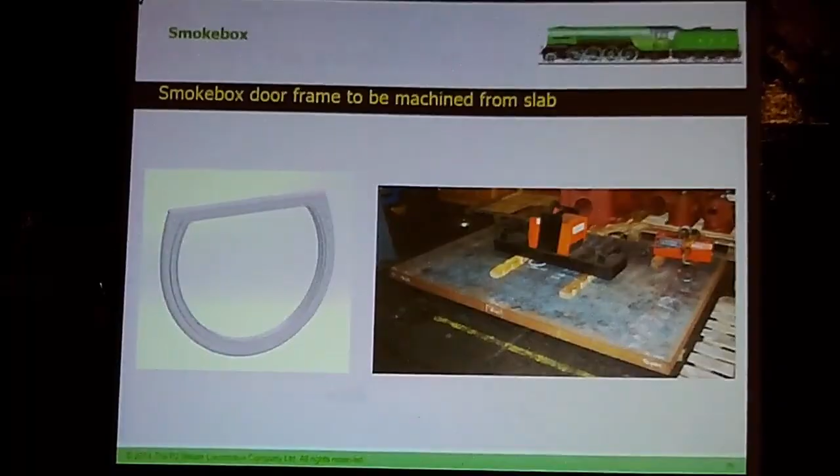The door frame, another problem. Normally you just gas-axe a big washer out of thick steel plate, put it into a vertical borer and machine it to shape. It's not round anymore, so it was made by CNC machining off our 3D model again.

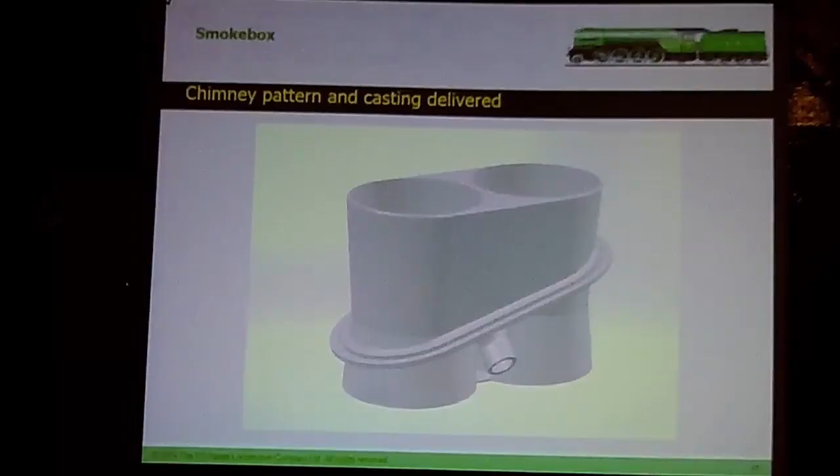The chimney, much the same kind of problem. The chimney's just gone back for some rectification because the machinist hadn't taken quite enough off it for us. But as you can see, it's an awkward shape, which means we have to have a full set of pattern gear. Tornado's chimney, one of which you'll see up there on the rack, can be made out of half panels because it's truly symmetrical. This thing has got a sloping flange on it, so from the woodwork on your left there's a complete set to be able to knock the chimney out of. Wood, just under 7 grand, casting 1,300 quid.

Very briefly, I shall talk on the subject of fundraising. £5 million for this - so far we've got commitments of about 2.2 million. So we've got a way to go. We're hoping to build it in 7 years, which simple calculations mean 700,000 a year has got to be raised, on average. To do this, we've used the same method as Tornado, which is essentially by asking people to donate.

For Tornado it was £5 a month and multiples thereof - an A1 for the price of a pint of beer a week, and in 1990 you could buy 4 pints of beer for a fiver. Not anymore, so we're asking 10 quid a month this time, and you can only just get 4 pints of beer up here for that kind of money. But that works very well, and for this engine we've currently got 770 people averaging about £18 a month each. So that's a good start.

But the problem is the donation curve builds up gradually while the spend goes up faster. So this time the boss came up with the idea of the Founders Club. As soon as we launched the project in September 2013, we invited people to write us checks for £1,000, hoping to achieve 100 people doing this by May 2014. Well, the response was spectacular - within 4 weeks we'd got 100, and when we closed the scheme in June 2014, we'd actually got 367 people, which with gift aid back, since we're a registered charity and nearly all signed up gift aid forms, should be worth 450 grand. So that's really got us going.

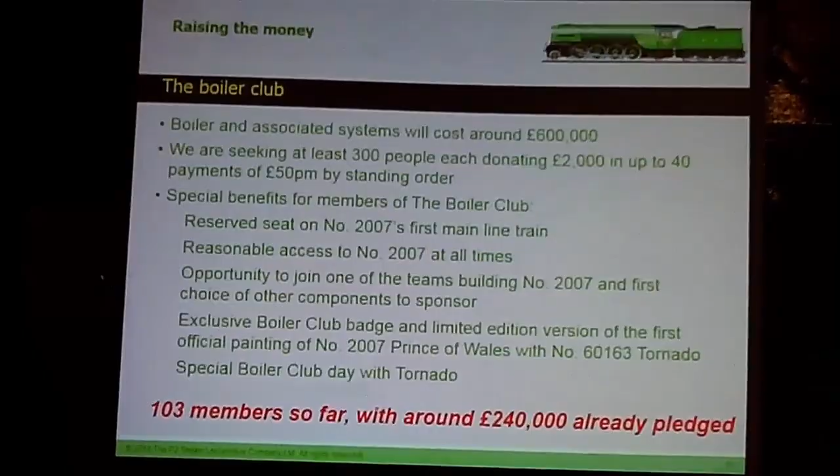The Boiler Club: when we built Tornado's boiler, we launched a bond issue to raise £500,000 to buy the boiler, because you can't buy it in bits, it all has to come in one lump. This time, again, the chairman said, let's see if we can put a club together for it. We're looking at £2,000 a pop, although we'll take it in 40 payments of 50 quid a month. We're now up to 103 members on that, in fact we've just got another one today, so it's 104 now, which with their gift aid takes us the other side of £240,000. So we're well on the way to being able to buy a boiler outright.

The latest wheeze is, in February, the boss said he wants the wheels under the engine by the end of the year. I said, slight problem, the cash flow is showing we're around £130,000 short to do that. He says, we'll start a little club. So he has, and the new one is the Mikado Club, making it a 2-8-2 Mikado wheel arrangement. He's got a little list, and we're looking for 160 people this time at £1,000, or 8 monthly payments of 125 quid. We've got 81 signed up already, and that's happened since April. So again, it's a scheme that's working.

What we've discovered is this: we think there's a collecting group out there. You know how when Hornby or Bachmann bring out a new version of a loco, they know they'll sell at least 500 to the people who have to have everything? We're finding this too. We've probably got about 60 people who, every time we put a new scheme out, sign up for it automatically. So that immediately means you've got an income stream there, and we're very grateful to them, because this is seriously helping us on the way.

And we have some commercial sponsorship. Every time Hornby sells a model of their P2, we get a small but useful donation. Craftmaster Paint provided all the finishing paint for Tornado on all its repaints, and we'd like to do it again with this one. Timken sells its bearings at OEM price and provides all the technical support free of charge, which is great. And of course William Cook Cast Products, our principal sponsor on Tornado, have cast all this lot for us. Although they're not doing it quite on the very beneficial rate Tornado was, it's still well worth having. We're getting some very soft payment terms out of them, plus they're a top flight company, so we know the quality is there.

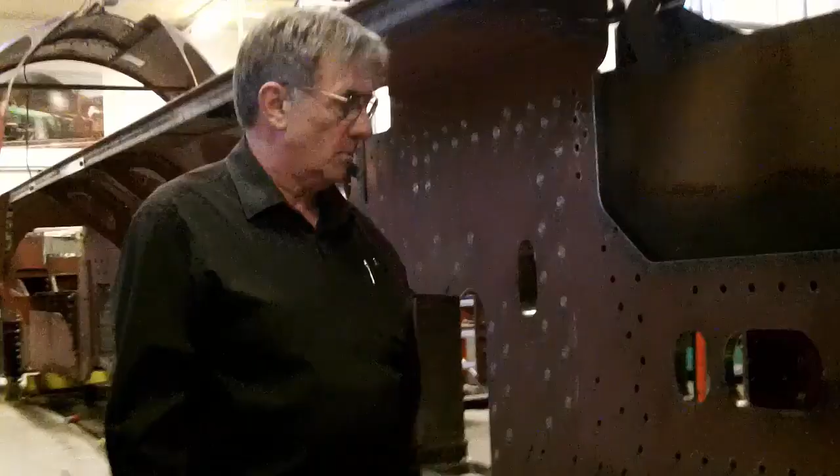Another trick we do - if we step this way a moment - is when we assemble things, we wet assemble them. This is something I learnt in the aviation industry, which I worked in for 17 years. We found with Tornado, when we had to take the buffer beam off to bore out the middle cylinder, there was quite a lot of corrosion on the angles and brackets behind the buffer beam. So this time, every time we put anything together, we give it a liberal coating of red primer on both faces and then clamp it up hard while it's wet. We'll see what happens, but I'm pretty certain it will considerably reduce this tendency towards rust forming between plates.

Most of this engine was bolted together, but there are some places where frame stays were fitted with rivets. We've stopped using rivets where we can, not because there's anything fundamentally wrong with them, but because we don't have people who rivet enough to guarantee quality contact every time. So the whole engine is held together with driven bolts.

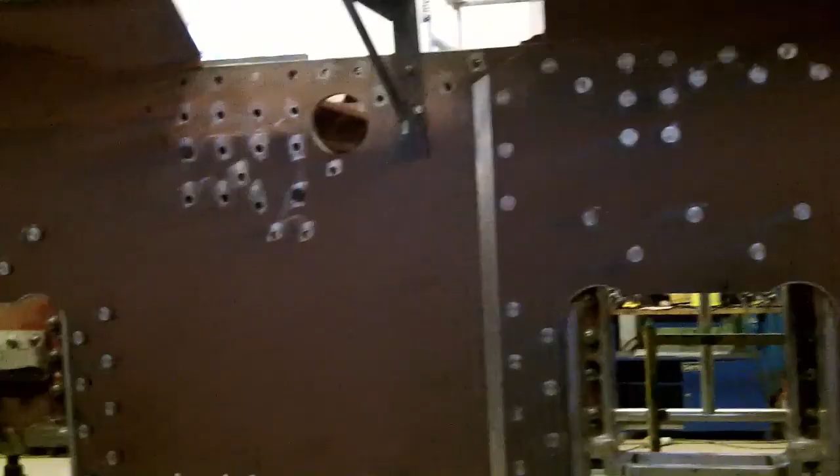This is a countersunk driven bolt. The technique is that all these holes, which were drilled CNC when the plates were machined, are left an eighth of an inch undersize. We position the object we want, for example this bracket, then drill through a 64th of an inch smaller than the nominal inch size, and run a power reamer through, which takes us to within half a thou either side of the 1 inch nominal.

We have the bolts made 1.5 to 2.5 thou bigger in the shank than the hole. They're then set with a jack, or if we can't use one, Mick Robinson's number 5/4 copper hammer with a 2 foot long handle, to bray them in. Once they're in, we fit a Philidas self-locking nut, torqued up to the appropriate level for the material and bolt diameter.

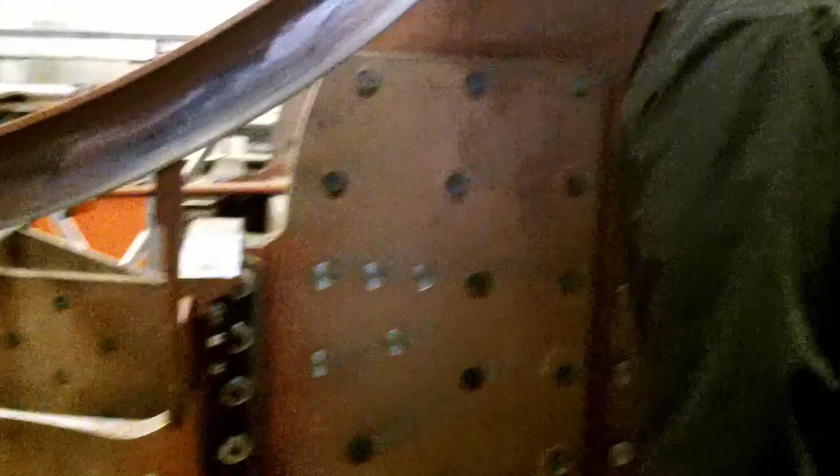Wouldn't cryogenics make the job easier, chilling it? I'm a bit nervous about that because I've seen some EN8 material that was chilled and formed cracks from heat contraction. The outside chilled faster than the rest, went brittle, and lots of little cracks appeared. That was actually on an axle for a heritage loco.

So we think the method is pretty good. It's slightly dearer than riveting, but it gives such a reliable and predictable joint that it's worth doing. We have to bear in mind that nearly all the bolts on this engine operate in shear, unlike modern technique where you design for tension, or rely on friction with loose bolts under shear. These are nearly all working in shear.

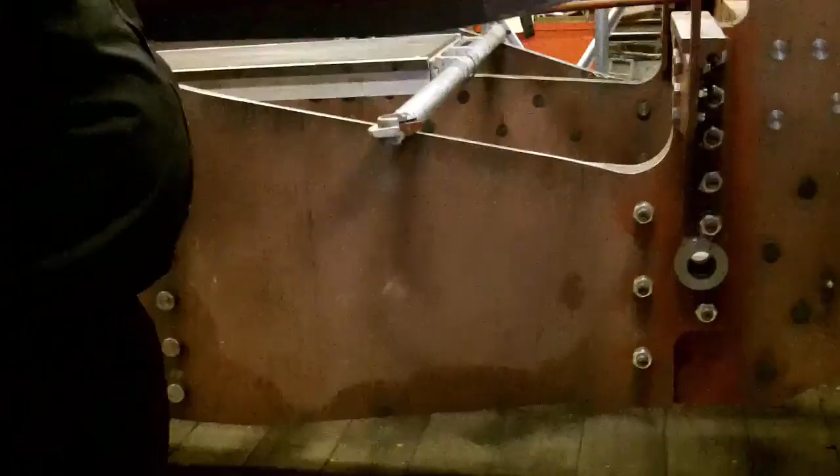This is the area where we did the bending using the heat and forklift method, where it just turns in there. On the outer frame stay, you can still see evidence of the press braking that put the curve in.

The cab is one area where we've gone back to rivets on a big scale, because that whole cab area is virtually completely unsupported, and it's 5mm plate - if you start welding anywhere near it, it'll go pillow-shaped and you'll never keep it flat.

So we've done the cab traditionally, which brings us to another feature the pre-war LNER locos, or earlier ones, abound with. Please look at the beading on the back edge of the cab here. Originally it was made from 2-inch half-round beading, which you could buy from any old steel stockholder, but today it's not made, so the first job is to make the beading ourselves. The method we use, if you follow me around here, is a bit more involved.

What we do is take 2 bits of 2x1 rectangular section steel with a 5mm strip between it, bolt it together with bolts submerged below the surface of the steel in 6-foot lengths, which we then put in that lathe and turn down till we end up with 6-foot long cups of beading that look like that.

Once you've done that, you rely on the skill of our two master assemblers, Ian and Mick, who hand smith the steel beading to fit the back of the cab, which is already rolled to shape. When you've got the inner and outer ones, you open the holes out. We use temporary bolts to hold it together during manufacture.

We put in even bigger, typically half-inch bolts with Allen socket heads, fully submerged below the surface. Then once you're happy everything's tight and in the right place, you weld all the bolt holes up and polish them back, and it just looks like that. Beautiful job, very, very expensive and time consuming to do.

Oh, it is, it's compound curvature. I was actually looking at having the compound curvature bit CNC machined out of a lump of solid, at which point Ian, our fabricator, took this as an affront that we thought he couldn't do it. So he demonstrated he could, and I apologised to him and let him get on with it.

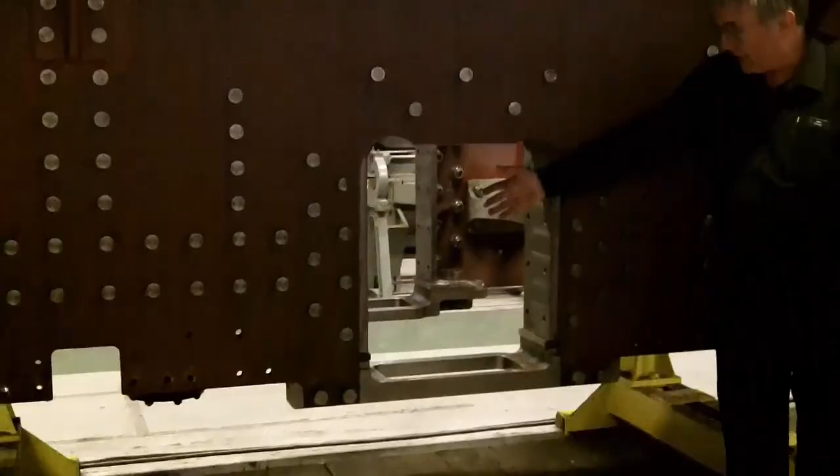We of course have to fit steam-driven air pumps for this, and I'd like to put them on the side of the boiler where you can get at them, but the aesthetic mob won't let me do that because it does rather spoil the look of it. So we've got two of them between the frames, same as we put two on Tornado, which has been a godsend on a number of occasions where we've had an air pump problem and just turned the other one on. I won't talk any more about the time when both of them went, but they are the most unreliable bit of a steam loco — air pumpery. But we can't get away without them today.

You have a lot of rotating machinery. Our group here is mainly interested in instrumentation. Do you look for harmonics, vibration, the movement of the various bearings or the shafts? Yes, we do — monitoring it.

Generally, we don't monitor the loco other than by checking things aren't wearing faster than we think they ought to. The roller bearings are all sized to be way in excess of what's actually needed for the loads and torques involved, so we don't have to worry too much about that. We just have to keep them fully greased all the time to stop water getting in.

The big area where we have had to do quite a lot of work is balancing. It's a reciprocating engine. We can balance all the bits that simply rotate, like coupling rods and the like, and you'll see big balance weights on most steam locomotives. On Tornado these were achieved the traditional LNER method, by casting a big balance weight in and then machining out lots of it to get the balance you require, boring holes in the back of it.